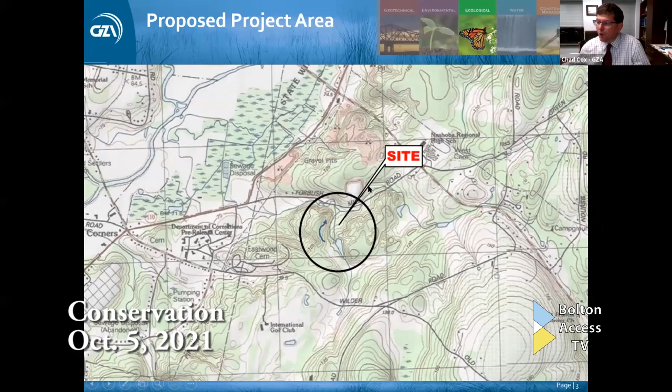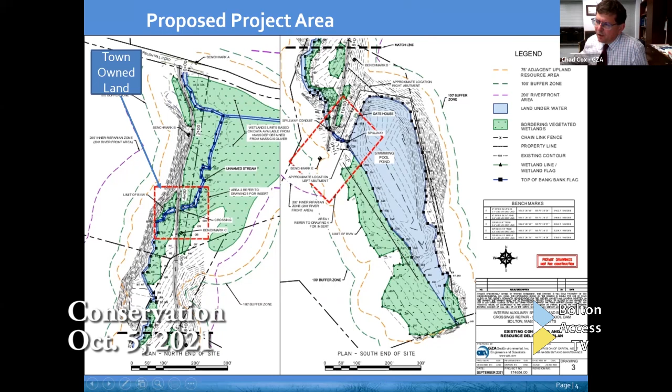This is our project area and our existing conditions plan. You can see it's a long linear site, with the north end of the site here on the left, Forbush Mill Road here. The primary features of the site are this unimproved access road that heads south, and this unnamed tributary that runs roughly parallel to the road, except where it crosses under the road through a culvert, which is actually on town-owned land. Up here at the south end of the site is the pond itself, swimming pool pond, with a small embankment dam here. The red area is where much of our project work is going to be occurring.

The purpose of our project is to stabilize the unsafe condition at the swimming pool dam and to improve the access road. We're doing this to protect both safety and the resource areas, and in advance of a future decommissioning of the dam. So this is an interim project. DCAMM's ultimate goal is to decommission this dam, to remove it as a public safety hazard, and to do an ecological restoration project. But this project is intended to stabilize the site in advance of that.

So the primary project features for this interim project are modifications to the existing spillway and its associated culvert.

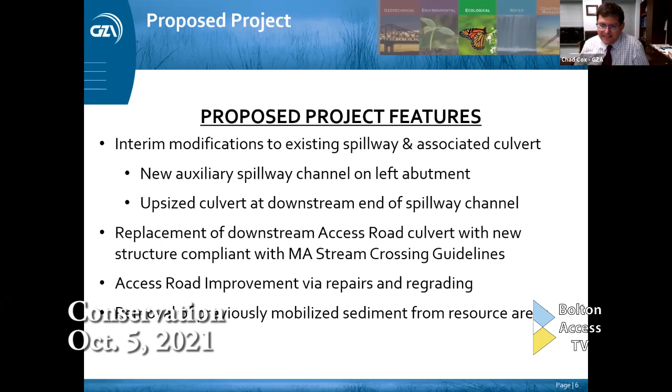We're going to create a new auxiliary spillway channel on the upland area of the left abutment of the dam, looking downstream. We're going to upsize the culvert conduit associated with that spillway channel, and replace the downstream culvert where the brook crosses under the road with a new structure that's substantially larger than the existing one and compliant with the Mass stream crossing guidelines. We'll repair the road and remove some sediment that was previously mobilized when the dam got close to overtopping. So here is the final conditions plan at area 1, up at the dam.

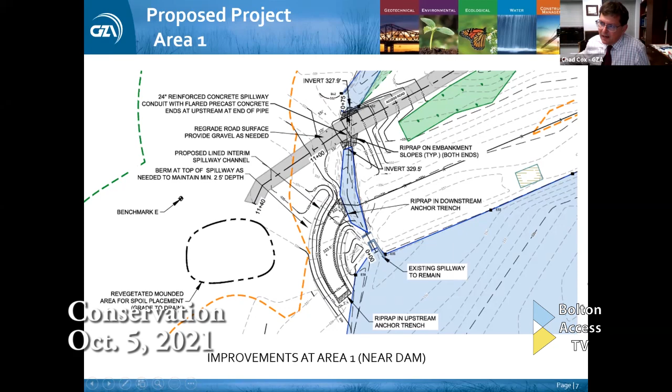The plan is to create this auxiliary spillway channel. The existing spillway will be left in place. It will remain the primary mechanism for water to get out of the pond through a little head wall here and into this open channel. But we're going to create this auxiliary spillway in case the primary spillway is again clogged or we need extra capacity. Then the water passes down through this final spillway conduit, which is also damaged and undersized. We're going to replace that as well with an upsized culvert pipe.

This is a profile and section through the proposed auxiliary spillway channel. It's a trapezoidal spillway channel, very simple, 8-foot wide bottom width, and we will line it with both poly sheeting and a protective overlay of filter fabric.

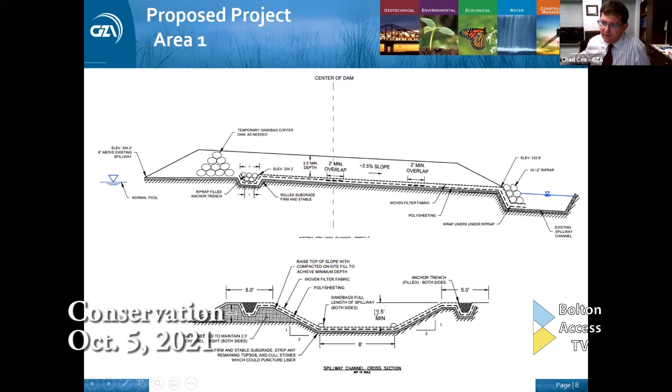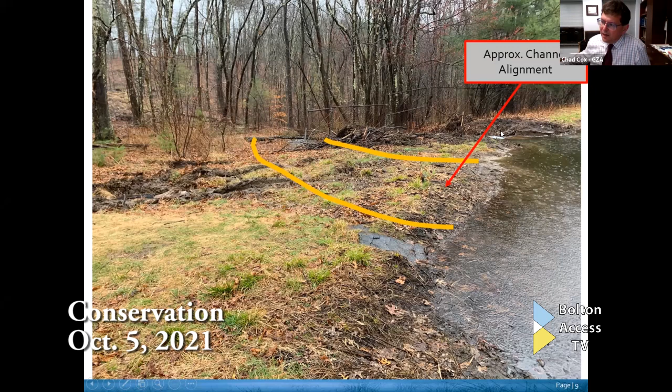This is a photo standing at the left abutment of the dam looking downstream. Here's the pond on the right, and this shows the general alignment of the auxiliary spillway channel that we're proposing to put in, which will go roughly parallel to the direction that the water already discharges through the existing spillway channel. Down at the bottom of the hill, we're going to replace the culvert that goes under the road.

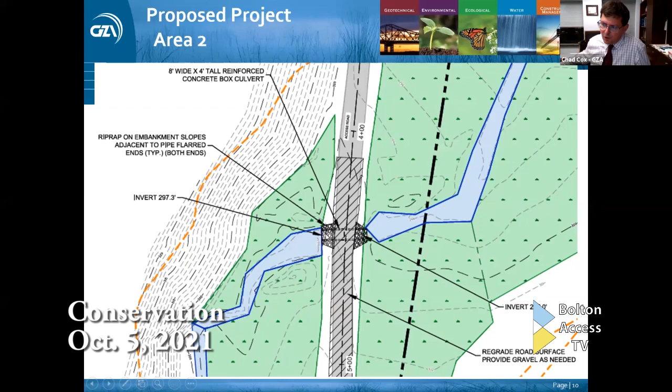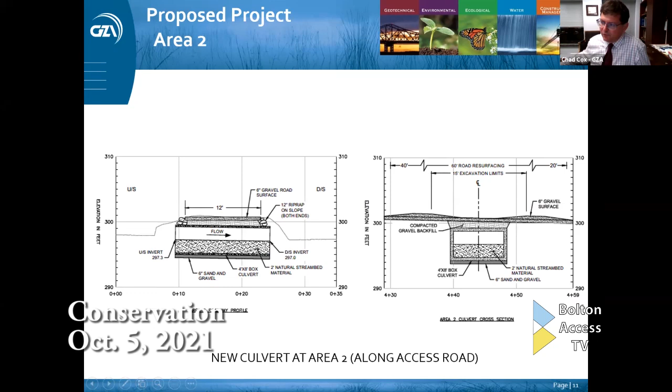We're going to replace that culvert, which is currently 15 inches in diameter and horribly clogged, with a substantially upsized culvert. This will be an 8-foot wide by 4-foot deep concrete box culvert, sized this way in order to comply with the Massachusetts stream crossing guidelines. We'll fill the bottom 2 feet of the culvert with natural stream bed material to facilitate aquatic wildlife.

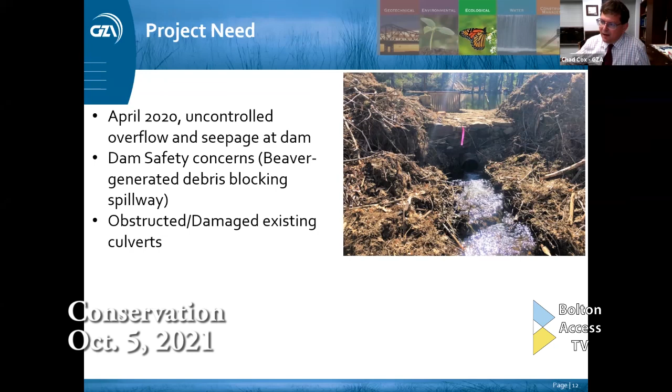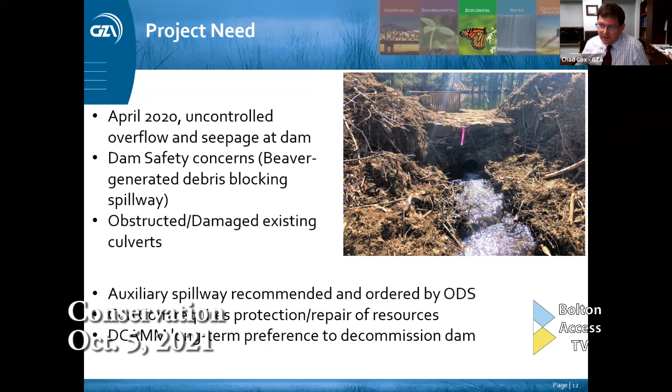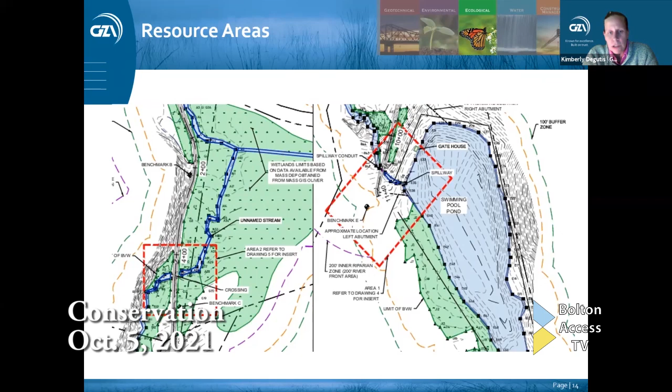This is showing the resource areas that were defined during the field delineation back in May and June of this year. The image on the left is area 2, the culvert replacement near the bottom of the hill. That area has got BVW, bank, and land under waters. On the right-hand side, that's the pond, that's the spillway conduit, and that's going to be the crossing replacement, which also has bank and land under waters.

Next slide please - these are just some simple shots of our... Can you go a little slower because the pictures aren't keeping up with your speaking?

Okay, very good. This is the erosion control and stream bypass. Again, this image is available in the NOI.

We're just highlighting certain sections of the plan sheets that you got.

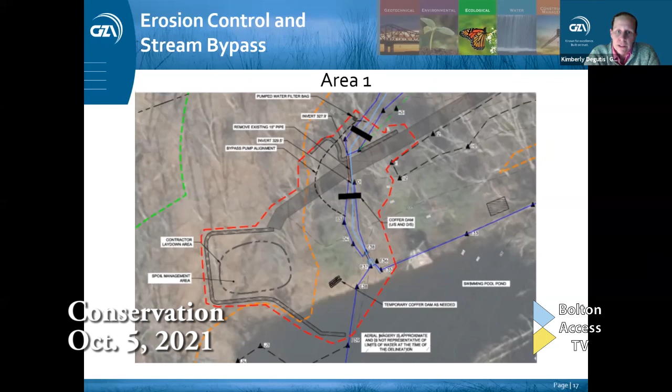For both areas, we're going to isolate the work area with either an aqua dam or some other isolating system. We're going to install a stream bypass system, allowing the natural flow of the unnamed tributary to pass around that area, and further isolate the work area using compost filter tubes inside the limits of work. This slide shows the work area at the dam, and this one shows area 2, the work area surrounding the culvert replacement project. Again, it's work isolation, stream bypass, and compost filter tubes as part of the erosion and sediment control best management practices.

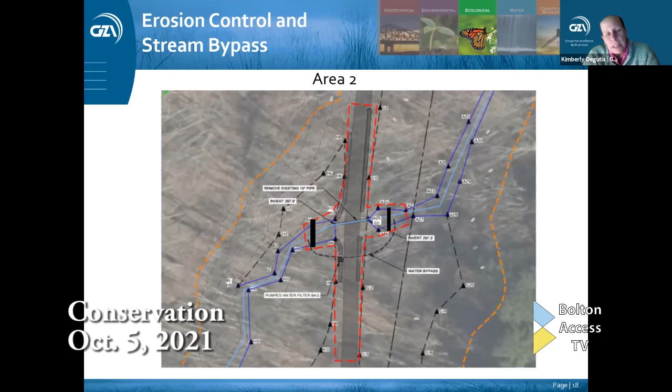This is area 2, the full culvert replacement, where we're taking the smaller pipe and replacing it with a large box. On the upstream and downstream ends, there's going to be a little bit of riprap to armor the bank. Again, we did overestimate the areas of impact to bank and land under water in this area.

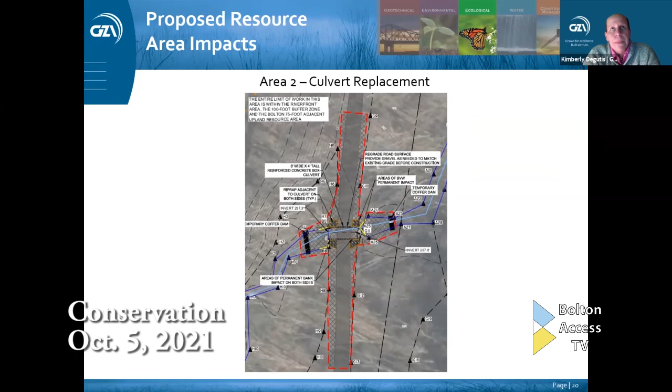A thing to note, for this entire project, there's 10 square feet of BVW permanent impact. So we made a request under 310 CMR 10.55(4)(c), under BVW. That's the de minimis exemption, for permanent impacts under 500 square feet. We can request that the Conservation Commission not require replication for such small areas.

This is our restoration plan. The yellow hatched lines are areas of proposed temporary impact, where workers would be walking and that sort of thing. There's lots of temporary impact inside the limit of work, and again this is a conservative estimate. We said everywhere inside the limit of work, the red dashed line, we're going to consider temporarily impacted, whether it is or not, just to be conservative. Restoration measures will be use of loam and a native seed mix.

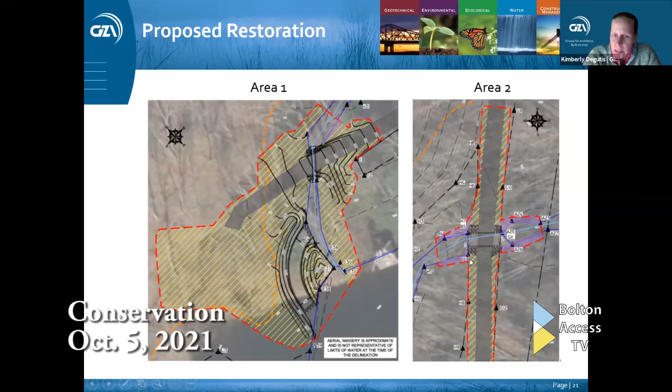The purple hatching is BVW. Those are also areas of temporary impact, and the same thing, using a native wetland seed mix, raking it in areas where workers have walked.

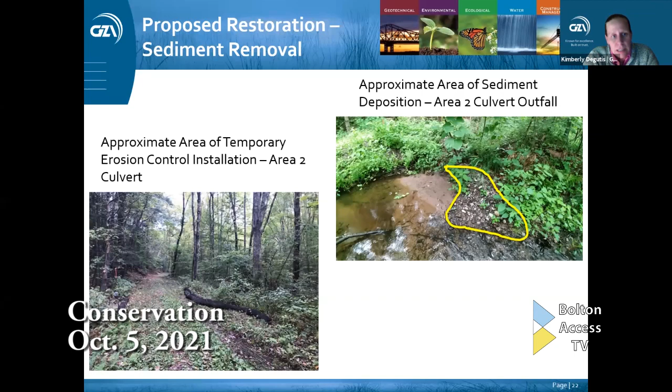This area won't be seen on the NOI plans because it's between area 1 and area 2. If you walk uphill approximately 400 feet from the culvert crossing, there's a silt fence on the left side of the road. The photo on the right, with the yellow polygon, shows the approximate area of deposition of non-native material. This will be removed, as with the area 2 removal, using manual methods, typically shovel and bucket, under direction of the wetland scientist, and the area restored using native seed mix. On the left, DCAM has installed compost filter tube on the uphill upstream side of that silt fence for additional protection.

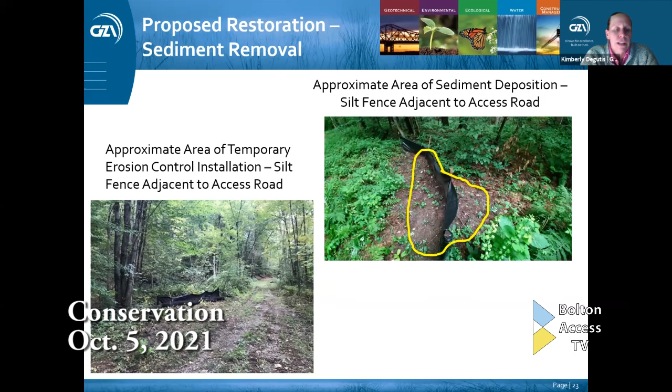This is area 1, the conduit spillway crossing. On the right we saw this photo before, showing areas of erosion across the road due to overtopping events. On the left, DCAM has installed compost filter tube to limit that overtopping and keep water inside the stream channel and pipe until the conduit spillway can be replaced.

Again, this is just a summation of the areas of impacts, shown in the NOI plans. We want to re-emphasize that the impact thresholds, especially for bank, have been overestimated for this project.

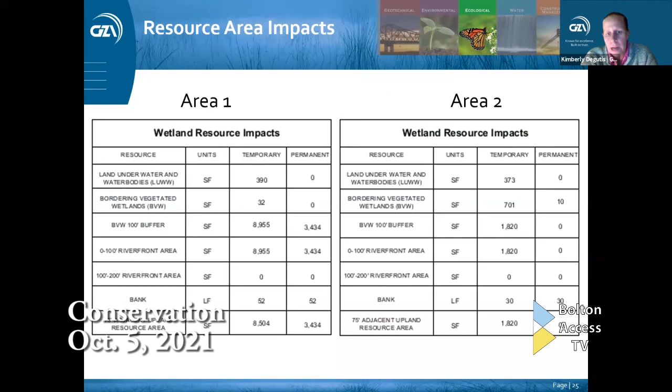This slide simply summarizes what we view as the benefits of the project. We think this project is going to protect public health and safety and protect the resource areas, and we'd be happy to take your questions now about the project.

Sorry, thank you for that summary. Any members of the commission have questions, initial questions?

Brian, my question is, does the dam ultimately have to be removed, or is there some way we can control flow and keep the water level low enough so it's not a safety issue any longer? Is the only option going forward removing the dam?

So, Brian, if I may. DCAM is presenting it this evening to just let the commission know that that's what they hope to do in the future. They will have to file another notice of intent, and at that time, the commission can certainly ask questions relative to the permanent solutions and have that conversation of, is this ultimately what needs to be done, and have that open discussion of some other opportunities. But at this time, it's solely based on the auxiliary spillway, the crossing, the resource area mitigation or cleanup, and the conduit being installed. But Bill, they will be filing another notice of intent, and that's certainly a conversation that can be had at that time.

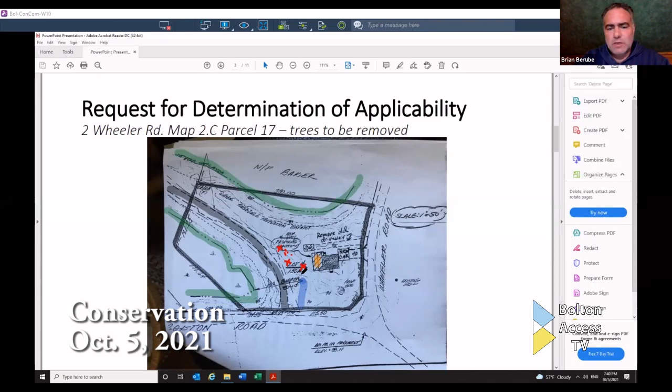Sure, well I don't have any initial questions. I'm going to open up to the other commission members. Do you guys have any initial questions? No, Brian, I have no initial questions either. I can see what he's trying to do.

Rebecca, did Emily have any comments on this? I know one of our commission members who wasn't going to be here tonight had submitted some comments on some of the projects. For this particular project, our other commission member had inquired about performing a site visit, and on the plan she had some difficulty seeing where the 100-foot buffer is. She was requesting a site visit just to understand what this area is.

And although there is a driveway through it, we'd like to understand a little bit better how this is impacting the home. I can say that I believe the 100-foot buffer actually goes in a sort of semicircular shape right up to the house, so the whole backyard is within the 100 feet. Between the road and the house, where those trees are, there's an embankment that goes up to a flat backyard—you can see the topo lines on the map. That was one of our other commission members' questions who couldn't be here this evening.

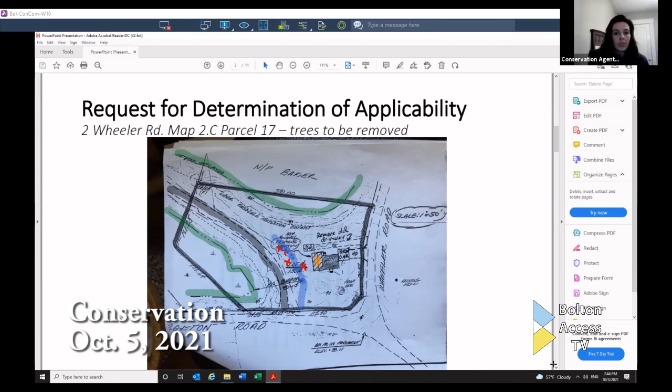Assuming Rebecca, you're good with me continuing? Yes. Okay, so the Bolton Conservation Commission will now continue the public hearing under Mass General Law, Chapter 131, Section 40, and under the Bolton Bylaw, Chapter 233, to discuss the request for determination of applicability for 257 Main Street, map 4.E, parcel 48.

Thank you, Mr. Chair. I am here, Greg Roy is here, Dillis & Roy, representing the applicant this evening. I appreciate it. And I think the applicants are on as well.

So I'll give you a quick overview of where we've been the last couple of weeks and then turn it back over to you if there's any last remaining questions. Two weeks ago we introduced the project again. The project is really to take down a few trees in the backyard for the purposes of creating a bit more usable space for the homeowners. I promised the commission we would provide a revised plan showing more detail relative to the proposed grading. I think I indicated at the last meeting that they're proposing to just kind of smooth off and grade the backyard area.

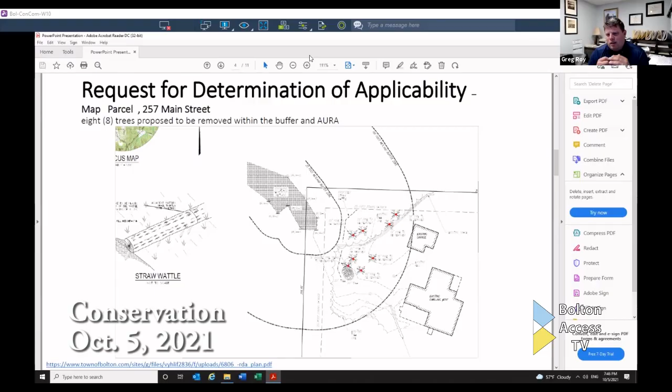So I did submit that plan to you late last week, and I'll summarize that in a second. I know that at least a few of you were on site, I think last Thursday. I wanted to take a minute to apologize to you and the applicant that I didn't have that meeting on my radar screen, and I could not make it by the time I found out that you were on site there. So I apologize that I was not present, but I trust that was a fruitful exercise for the members that made it.

So really we did four things. We submitted a cover letter along with the revised plan, but we added a detail that indicated what we're proposing to do with the existing swale along the property. We're going to just kind of dress that up, as I indicated a couple weeks ago, with some crushed stone, which I think will improve the swale from an aesthetic standpoint, but also maintain its ability to convey flows and mitigate any potential for erosion or soil loss in that area.

We added the proposed grading to the plan on the backyard area. We added, what else did we add? We added the limit of work on the plan, just to specify where we're proposing to be grading, and I'll talk about that more in a second. We also added some additional specifications so the commission understands exactly what we're proposing for restoration in the area where we're proposing to grade.

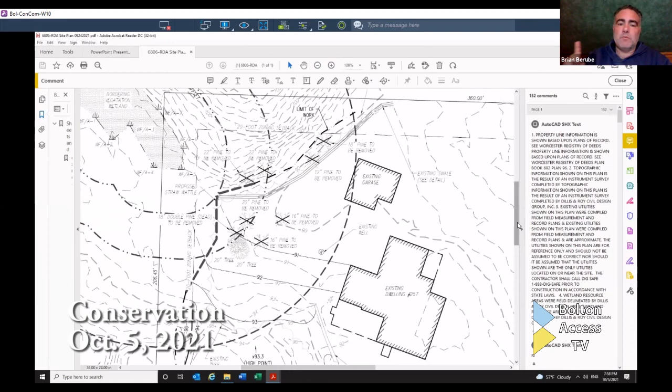All right, do other commission members have any other questions currently or thoughts? All right, Rebecca, anybody from the public here to comment on this?

Nope. Okay, commission members have any conditions that they would like to see added to this? Added to the RDA as it currently stands, as it's currently proposed, other than the permanent demarcation of somehow memorializing the extent of work and what can be worked on versus what should be allowed to stay. No, not for me, Brian. Okay.

All right. And as far as the 8 trees that are being proposed to be removed, any questions or issues with any of those? No, I had no issues, Brian.

Okay. Brian, my only question with those is, would the commission be willing to leave them as snags or request that? Because I'm looking and these 2 are actually outside of the limit of work. So I would just want to make sure that there's no stump grinding outside of the limit of work at the very least.

And I think we had mentioned that on site. Is that something the applicants would be amenable to? I can understand the 4 in the center - you're looking to remove those to create that yard, but the other 4 trees, would you be willing to

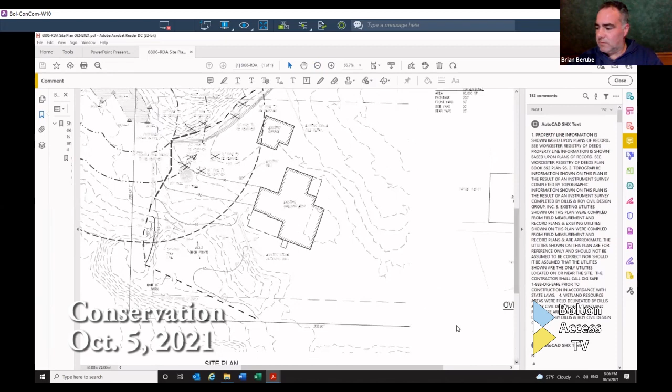I was gonna say, Rebecca, let me know if you're ready to move on to the next. Or... my screen is being weird. I apologize. Yeah, I saw you struggling there. Thank you, I appreciate that. Oh, I know why. I am all set to move on, Brian. Okay, so if you would like, I believe Meadow Road is next.

That is correct. So at this point in time, the Bolton Conservation Commission will now continue the open public meeting under Mass General Law, Chapter 131, Section 40, and the Bolton Bylaw, Chapter 233, to consider a notice of intent filed for Meadow Road, lots 7 and 8, map 4.D, parcel 101, proposed shared driveway grading and associated drainage.

As I can see via screen, it looks like the applicants have requested a continuation via email. Any commission members have a reason why we should not continue? Any members of the public here tonight to comment on this? All right, nope, it is just us and the next applicant. And so I'm looking at 7:45 on the 19th.

Yes, okay. In that case, I'd like to make a motion that we continue the public hearing for a notice of intent for Meadow Road map and parcel 101 until our next public meeting, Tuesday, October 19th at 7:45 PM. I second that. All those in favor, starting with Bill, aye. Jillian, aye, and Rebecca, aye. I am, and I myself. Thank you.

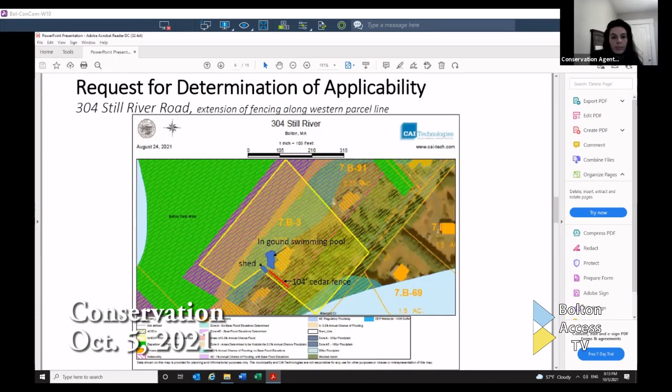All right, next up. The Bolton Conservation Commission will now continue the public hearing for a request for determination of applicability for 243 Berlin Road, map 3.C, parcel 11, proposed garage extension to replace a lean-to structure.

Rebecca, are you able to give any updates on this, or is the applicant here tonight, or anybody representing the applicant? The applicant is present this evening.

This was the site that the commission and myself were out to visit at various times in the morning. What was observed on site was that it is in very close proximity to wetland resource areas. However, there was an existing structure there that has been there for some time, much like other structures on site. It does seem like the applicant has maintained the 25-foot no-disturb area toward the rear, which is appreciated and expected. I would echo some of the other commission members' comments, which was that for the proposed structure extension that will go over the previously existing structure that was recently removed, the outside of the foundation should not be regraded, rather leaving that area to naturalize.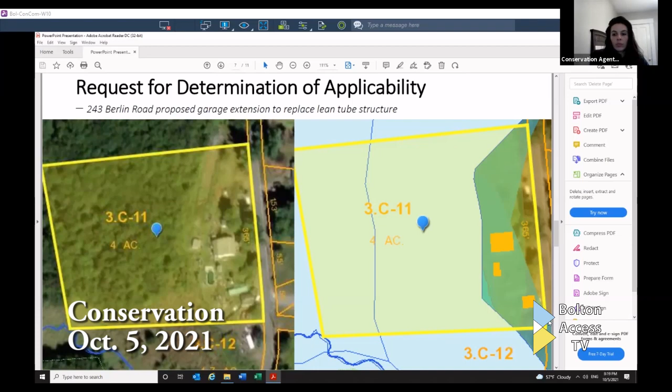The Bolton Conservation Commission will now continue the public hearing for a notice of intent filed for Century Mill Road, map 3.D, parcel 75, regarding proposed construction of 3 single-family homes and the widening and paving of an existing gravel driveway. I can see they have requested a continuation, and I know they are waiting to get their arborists in there to try to answer some of the questions we have.

I see no reason why we should not grant the continuation. I would like to make a motion that we continue the public hearing for Century Mill Road, map 3.D, parcel 75, to our next public meeting, Tuesday, October 19th at 8:15 p.m.

Do I hear a second? I have one question: will we be able to be on site when the arborists meet? The arborists will be meeting October 13th at 9 a.m. If you would like to attend as well, that is acceptable. However, if we have a quorum, I will need to post it as a public meeting, so it would be helpful to know ahead of time who will be coming.